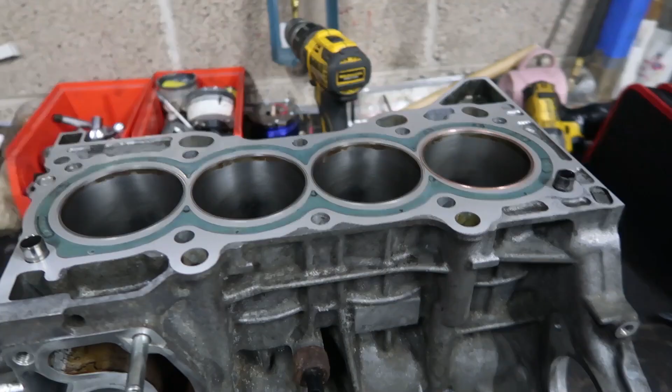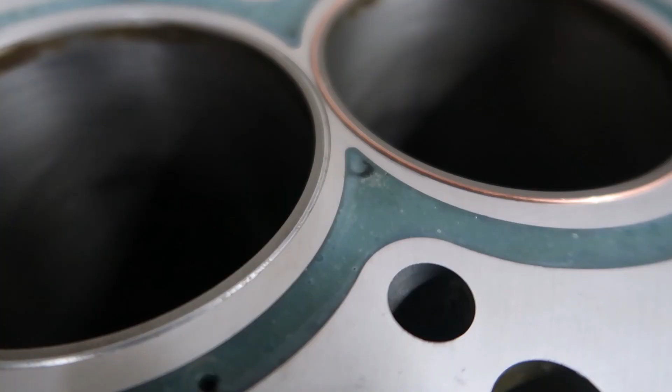The idea is you don't want the head to lift or pass any exhaust gases through, because I'm going to be running on ethanol and some seriously high-ish boost numbers, prepping the block for 3 bar of boost if we wanted to go there. So yeah, we're going to start off and do these O-rings, and I'll show you me putting them in.

So O-ringing this block and decking it has been an idea of mine for a long time. I got in touch with an old school friend called Stuart Bernardini, and he's got a machine shop, 5-axis CNC lathes, all the gear. So we decided to put both our ideas together, and he ended up making the tooling, the fly cutter, and we've done some R&D with different heads to make sure that we get the right seat for this wire.

So this is just solid copper wire, and we won't tell you the specs exactly because we're going to be offering this if you want your block done, decked, with the head decked, so it's completely flat. This thing is like 0.0002 of a millimetre over a metre long, so it's completely flat. We're going to be offering this as a service mainly to folk in the UK, because there isn't really anyone around that will do this to your engine.

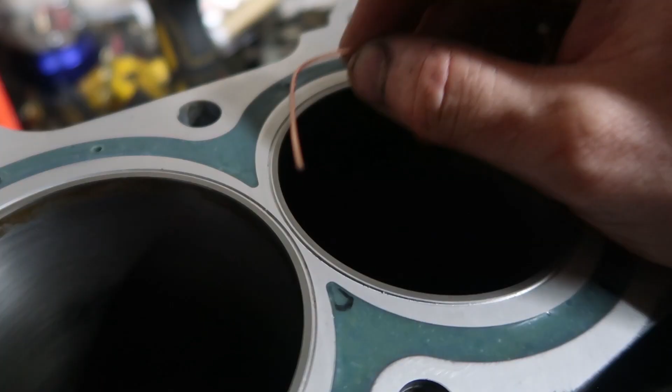So this will be really hard to show, but I have squared off the end of this copper wire. I'm going to stick it in, then start chapping it around until I get near the end, and it'll give me the size I'm needing. I've just cut this bit, which is a bit too long, because you're better to be longer than shorter. Once I've got it near the end, I'll snip it, and then I use a file to make sure that both ends are flat.

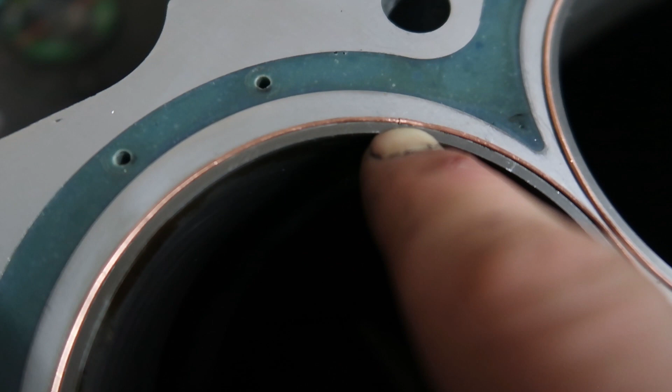So when they go down, like this one here, you can see the gap. A tiny little gap that you can hardly see. It takes a couple of attempts, but that's what I'm after. It's a lot of filing, but that one's just there. Tiny wee midgy ball hair of a gap. By the time the head's down and that's squished, that gap will probably be soaked up. So that's the first two done. Just going to go to the next one now. I'm using a nylon hammer.

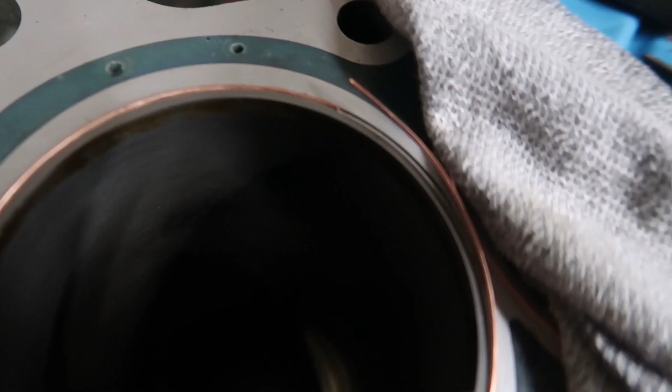So when I get it close enough, you come down and see it's slightly too big. Slightly too big there, so I just file it down till it's square, and then just finalise it and tap it in. O-ringing is complete.

Oh man, it looks so sick. Better in person than it does on this camera, probably. Still need to hone the block, but I'm going to drill the rest of the holes for the head gasket.

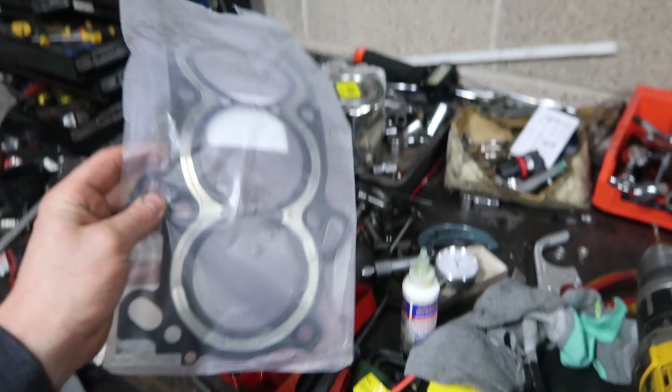And I want to show you something about here, because I've had some people say that, oh, these holes are not going to be flowing enough. Let me show you this. So here we have the OEM head gasket, and look at the holes in this. Guys, there isn't any. Okay, so I'm actually going to put holes in it. This is a K24 head gasket, though the K20 is slightly different, it has different holes.

So I want you to try and think of this in a sort of different perspective. I like everything flowing fast, you know, high pressure, everything's flowing well. But with a coolant system, it's kind of a little bit different. And this is something I learned, but I'd like to pass it on to you guys. The reason you have small holes on the head gasket itself is actually to slow flow down.

And if you think about it, the heat from the cylinder walls needs to transfer into the water. So if you have the water rushing past, it doesn't pull the heat out of the cylinder wall. So you actually need the water to slow down enough to let the heat transfer from the cylinder wall, the barrels themselves, into the water and then through into the head and out. So that's the idea of small holes. It was something that took me by surprise. Like, oh yeah, it kind of makes sense.

So yeah, what I'm going to do is, I think these were around about 3mm holes that I used, and that to me is going to flow enough. I don't know if you've seen on Instagram a while back, I'd done a hose in the block, and it showed actually how much water flows out just from them little holes. But if I have overheating issues, you know probably what's causing it. That's one thing I'm actually half nervous to see, how it copes with the heat management. So yeah, like I say, send it, we'll see how it does. But what I'm going to do now is drill some extra holes in the head gasket.

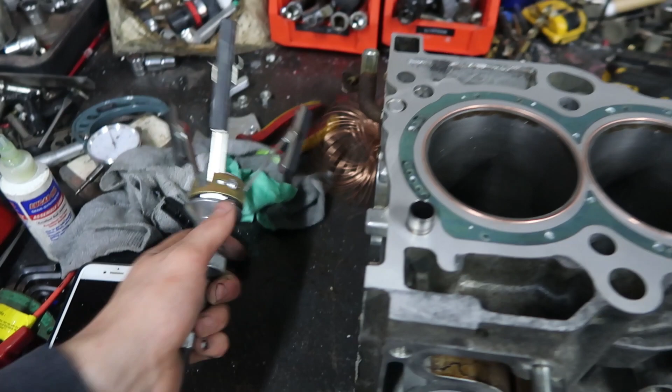Anyway, what I'm going to do now is get the hone tool here. I'm going to bash it in. We're going to give these barrels just a bit of a hone. We're going to clean it all out again. We're going to get the piston rings, and we're going to start ringing the block. And we'll go over the specs I'm going to use as and when we go. And as per usual with this, it's not a how-to, it's just how I'm doing it. This is my engine, my prototype. You can do whatever the fuck you want, but I'm going to hone it with this.

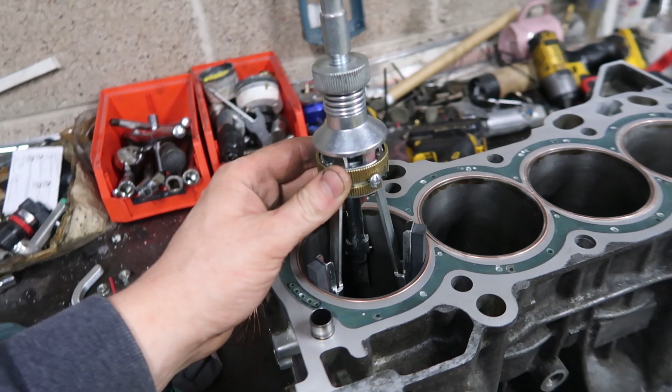You can actually see the original hone marks are still there. If anything, they're not steep enough for my liking. I like around about 45 degrees, which does mean I'm going to go up and down quite fast. I'll start off slow, and then once I've got the cut I want, I'll start going faster, a few passes to get them grooves in there. And don't go too far down because you start hitting parts of the block you're not supposed to.

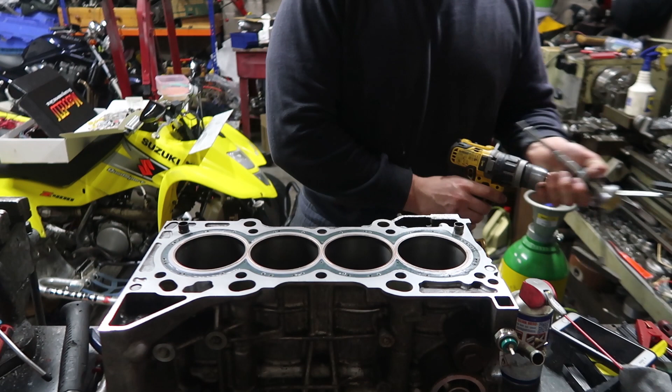Right, do not fall over. Fucking expensive camera. It's a shame the bastard won't focus though when it's supposed to.

In here I've also used WD-40. Folk use different stuff, I just use this because it's light. If I use engine oil it might lubricate it a bit too much. So I'll go down to see the max I can go, and then I know just basically to stay above that.

Just giving it a clean. Oh yeah. And then that's it, kind of as clean as I wanted it. I can see the brown marks at the top are coming away now. So now I speed it up a step, and I just start giving it fast up and down.

Let me show you what it looks like. Like I say here, probably need to give it a clean down, but you can see the hone marks now. The sort of 45 degree I've gone for, quite a drastic angle compared to standard. And also I've got rid of all the brown marks, the glazing, the varnishing inside the barrel. That's all I'm going to do, and I'll do the same for these other three, just so the rings are nice and going to bed into a nice fresh surface.

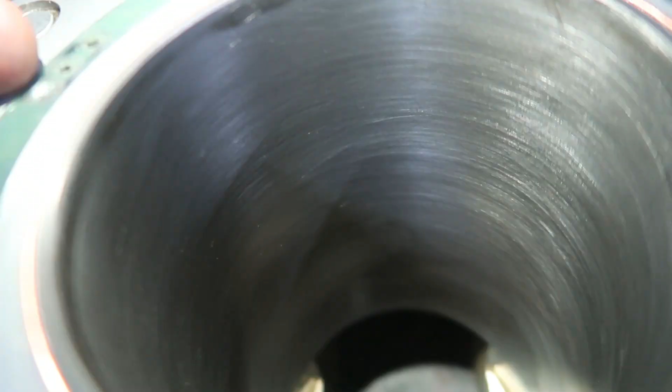So you can see here, this is the nice fresh hone marks, and this is when it's untouched. You can see down the bottom there as well, there's a step, a very slight step of carbon glazing build up, so that's what we're wanting to get rid of, that brown shite down there. All done. Needs a clean obviously.

You really need to clean out these barrels once you've done the hones, because there's like microscopic bits of, you know, grinding stone and steel and stuff like that. So that just turns it into like a lapping paste. And when you're in the car without cleaning it, it just basically glazes up the bores. And if you didn't know, glazed bores cause less compression than bores like this.

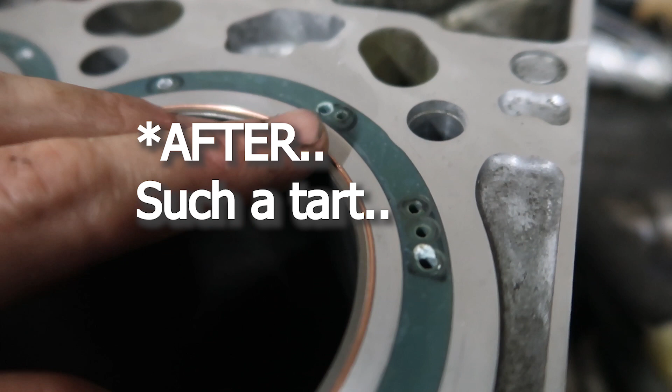What I should say though is I probably should have done this before. I probably should have done the O-rings before I'd done that, because the wee tool kicked out, and as you can see here, it nicked one of my copper O-rings. I think it was flying out at a rate of knots. It snapped itself there. Just... she's a right hoorah tool like.

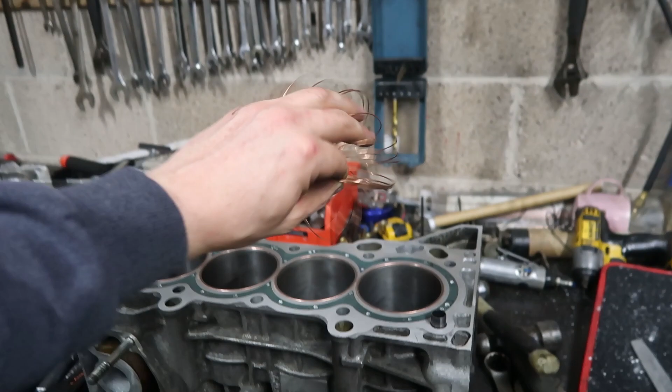So what we'll do is I'll get a pick and I'll pick out this ring. Not looking forward to that, to be honest. And then we'll just stick in a new one. I've got loads of this stuff, so we've got plenty spare. Rings now, just when you put your pink paint markers in there, just make sure to drip all over your rings. Oh, gonna hate to clean these bastards up already. That shit doesn't seal too good.

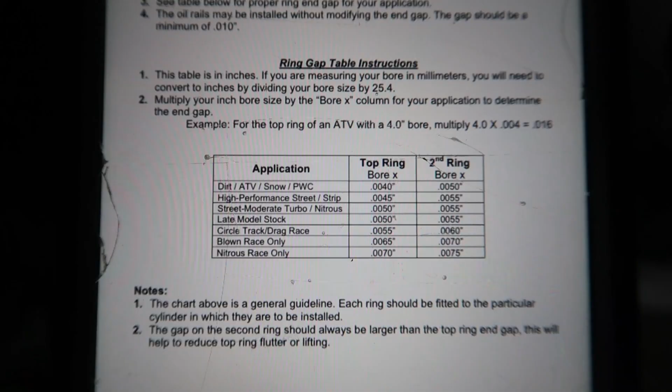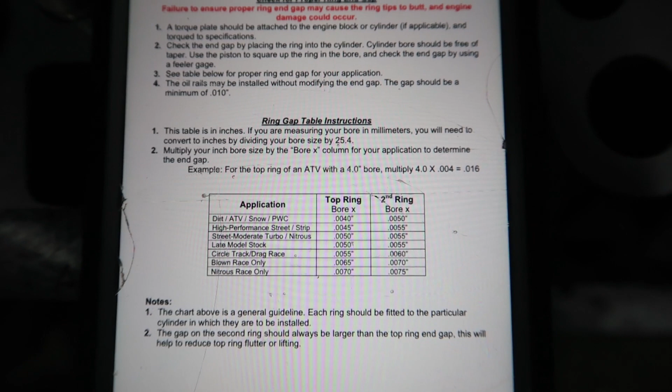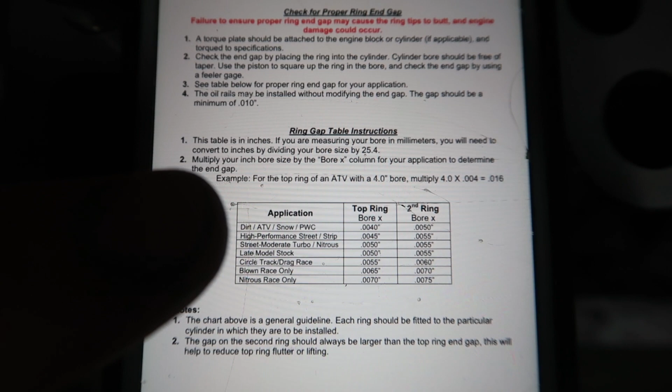So I lost my bit of paper, but here's the Wiseco piston ring gap thing, and this is all in inches, so I'm gonna have to try and change it. I'll see what my feeler gauge says and we'll go with that. But to calculate it out, basically you need your bore size. So our bore size is say 3 inch for instance, 3.5 or whatever it is, and you have to multiply that by the size that you're after. So we're going to go for high performance street strip or street moderate turbo.

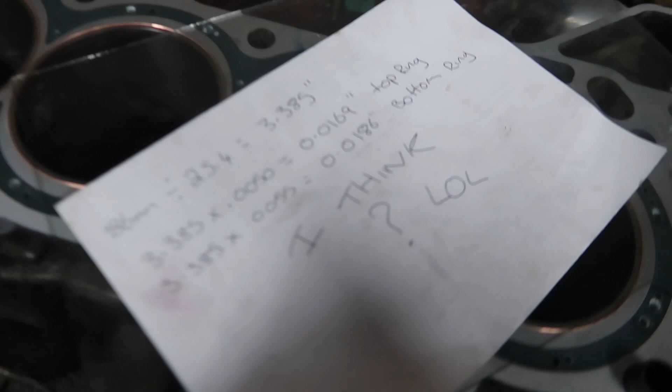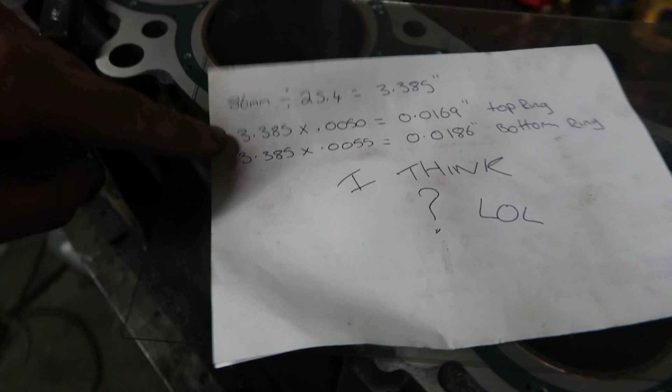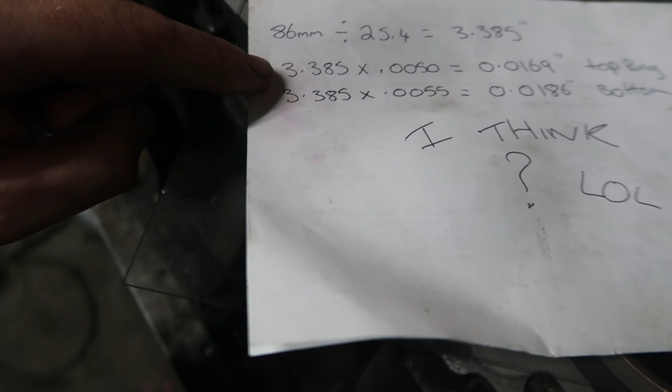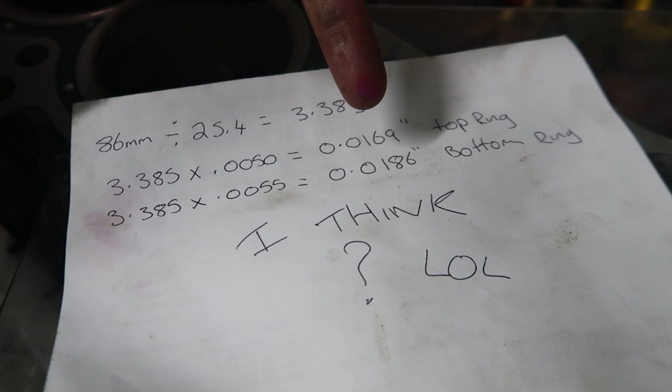So to save you guys all the calculations, because it took me about 5-10 minutes to work this out because I'm not very good at maths, I ended up using my phone. But 86mm divided by 25.4 gives you 3.385 inches. So then you take your 3.385 inches and times it by the 0.0050. And that gives you, is that 16 thou? I think that's 16 thou. I hate this imperial system, but hey, we're going to go with it.

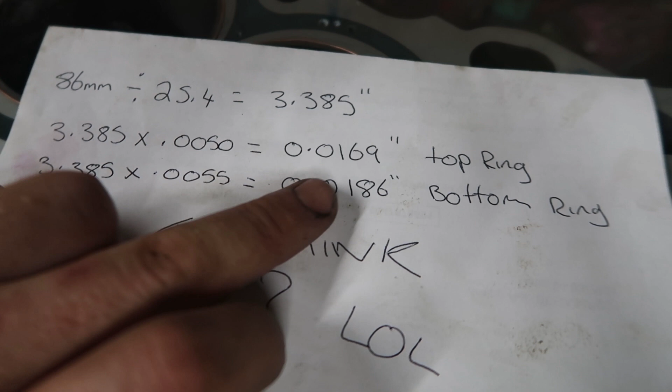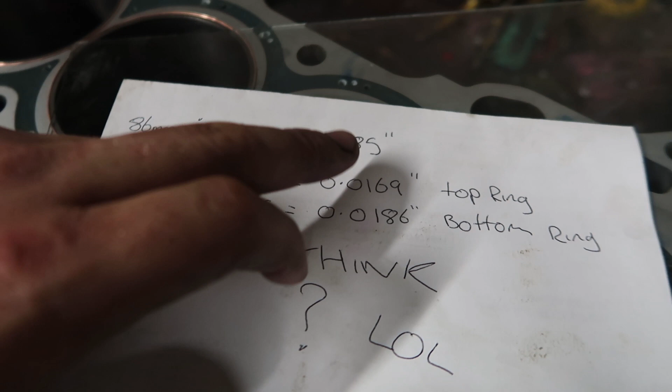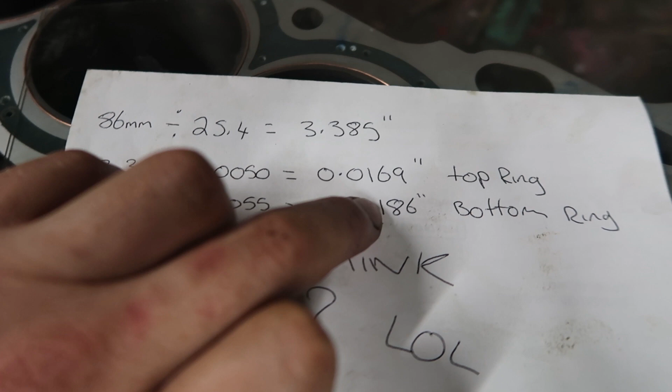So the top ring, we're going to say is going to be 16 thou. And the bottom ring is going to be 18 thou. You want the second ring to always be looser than the top ring. I think it's to do with blow-by, so the blow-by goes down the way, it doesn't cause a pocket in between the two and cause pre-ignition and all that sort of good shit. So 16 thou and 18 thou, yeah, you could probably say that's 17 thou.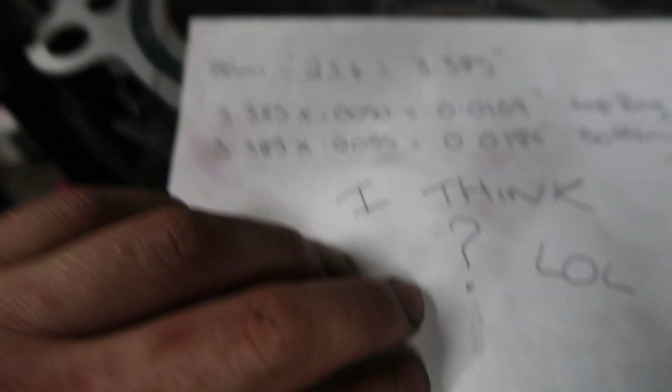Because I'm just going to go with it. I've got these feeler gauges out here, and they do inches and millimeters. So if you work in millimeters, 16 thou is 0.4 mil, and 0.457 mil on the 18 thou.

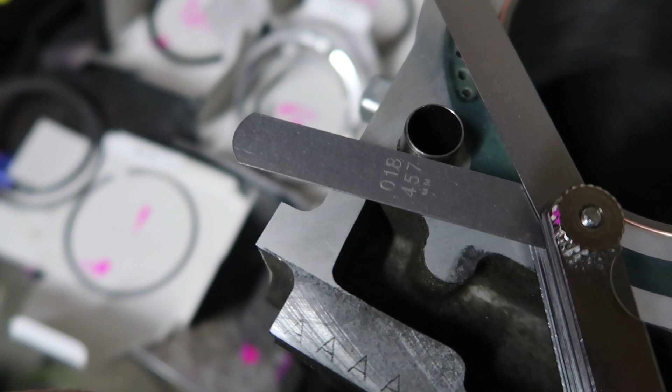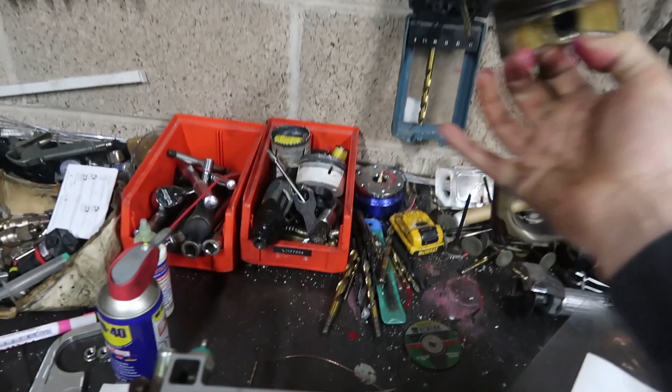So, to stick the ring in the block, you've probably seen this a million times, I don't know if you've seen it in my last videos. Put the ring in and then center it down with an old piston, just to get the ring all level for when we're doing it.

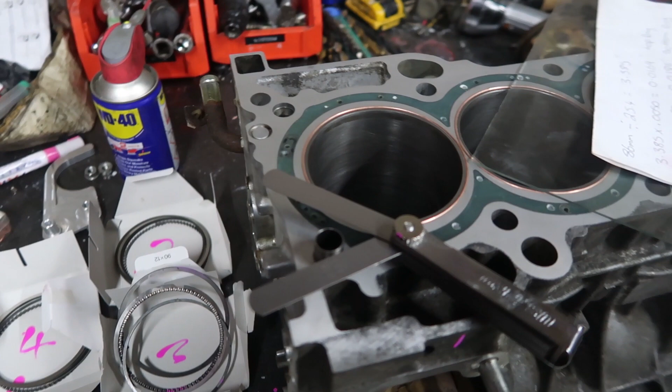And for grinding these down, I don't really want to show you, but I'm going to use the bench grinder because it's a lot faster. I've done it heaps of times now and I kind of get a feel for it. But if you guys are going to do it yourselves, don't do as I do, do as I say - get yourself a piston ring tool or grinder, whatever you want to use. I'm doing it my way or the highway.

So yeah, first ring I've put in there. I've not done it yet, but I'm just sort of getting there. Oh my god, this camera is doing my head in. But it's in the seat there.

The reason I'm going to put all the rings in is because if you find one that's particularly slack, you can move it around till you get it where you need it. This thing here has a marker on it saying N for no chance, and to get the rings in I like to push them in like this and spin them round, because otherwise you can chip the corners.

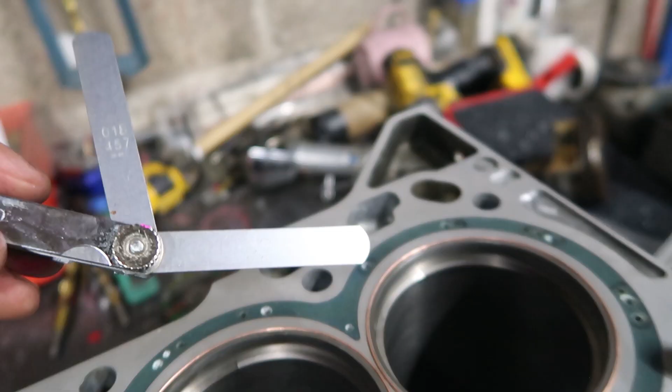That gets it in. So first things first, I've tried... yeah, bastard. So as you can see, my wee gaps in here - this camera is not going to focus on what it should be - and I've just made sure that these don't fit any of the gaps, and they don't, and that's the 16 thou, so I just need to open them all up now.

Just a wee midge's ball here. So there we have it. We have it fitting in there snugly, fitting in there snugly, fitting in there snugly, and fitting in there snugly. 16 thou. Fucking camera.

So I don't know if it's just me, but most times it doesn't matter if it's D16, doesn't matter if it's K20, doesn't matter if it was 1.8 turbo - any of the engines I've built - the second ring always is bang on. I never have to touch the second rings ever. I don't know what it is, they just seem to be bang on.

But there's not a lot of information as to what to do with the oil rail. So this is what we class as the oil rail, or the oiling scraper rings. These don't really get clearance as such - you just need to make sure there is a gap. I'm sure as long as it's minimum like 0.1 of a thou, a 10th thou, which is like fucking nothing, it doesn't really matter the size of these.

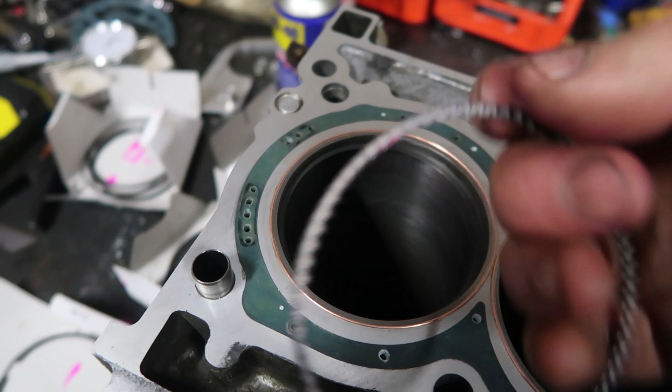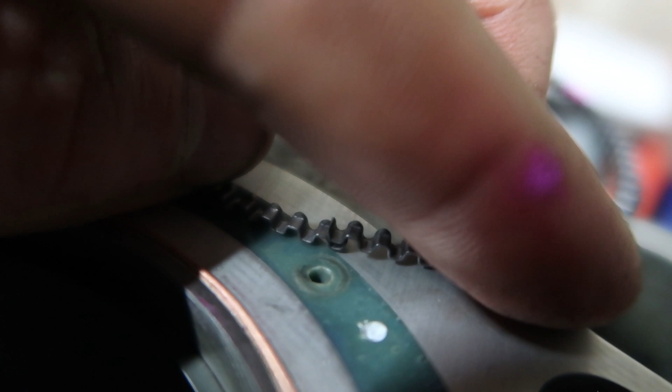Don't worry about them too much. You don't gap them like you do your piston rings. You just need to make sure that this piece here - it's going to be impossible to show you, hold on - just got to make sure that it butts up against each other and doesn't sit on top of it or anything like that. Like that, that's bad. And like that is fine.

Just a quick look inside here, and spread it all out to make sure that it doesn't butt up. They should always be slightly smaller than the bore, but it's more just a double check that something hasn't happened at the factory where they've made the rings and there was a mistake. So just check them anyway, just chuck them in to make sure you've got plenty clearance.

So what I'm going to do now is give this block a good clean down, just keep cleaning it, and then I'm going to whip the pistons out. We're going to put the pistons onto the rods and we'll put the rings onto the pistons and get ready for assembling the bottom end.

So we've got it upside down now, and now I need to block off the oil jets. Typically you block off these oil squirters when you're going forged pistons, because the forged pistons themselves are a better material and can take a bit more heat. These cooling jets are good if you're going for a cast piston or stock block, but yeah, we can get rid of them now.

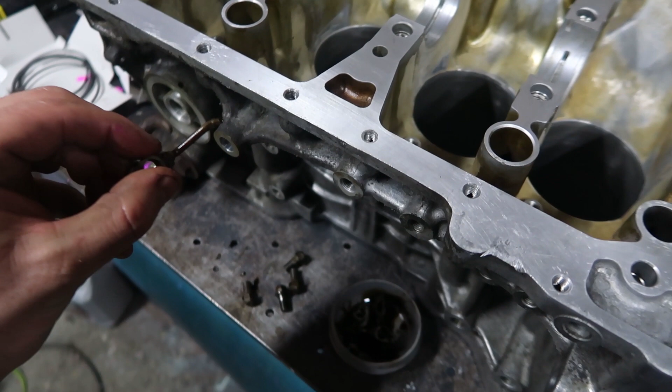So I just need to go on the lathe and whip up some wee spacers, because these have little holes in them which feed out to the squirters. Once you do that, you get more oil pressure because you've not got it all leaking out of the wee squirters.

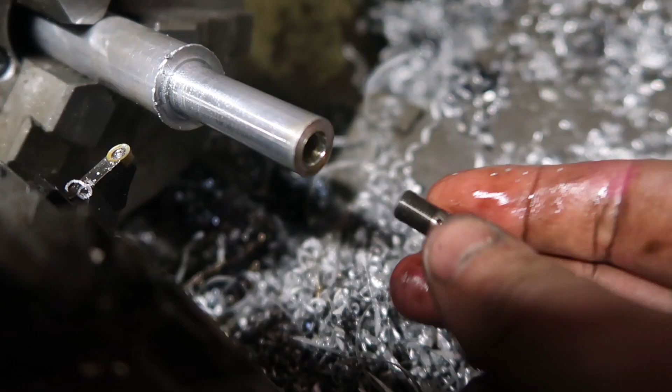So we're on now to the lathe. I've just chucked a bit in here. We'll turn this down to around 12mm, maybe 12-13mm, and then bore the inside 8mm, and then part off the little pieces we're going to use for blanks. That looks like it's going to be perfect.

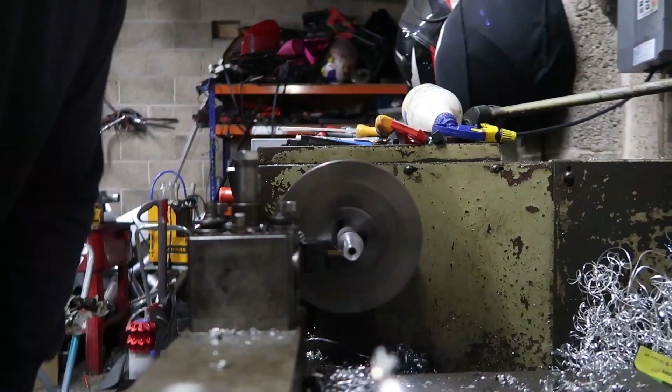There we go, wee spacers made up. I'll just thread lock the ends and stick them into them.

So I've cleaned down the surfaces here, I've got the bearings in place, I'll probably stick some oil in here, and then I'm going to lay in the crank.

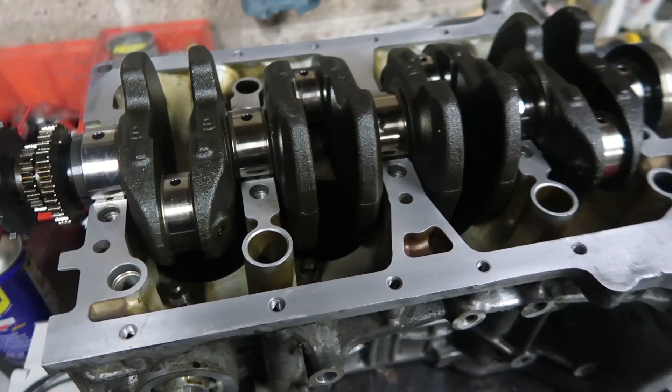So crank end looking shiny, I've got thrust washers here. Eventually found them after my missus had hidden them away. King bearings I've gone for. The OEM ones though, you'd be fine, they've not worn down at all, especially because I'm DCT gearbox. But I think they're just very slightly thicker maybe. Yeah, we'll fire them in anyway, we've got them, so we might as well use them.

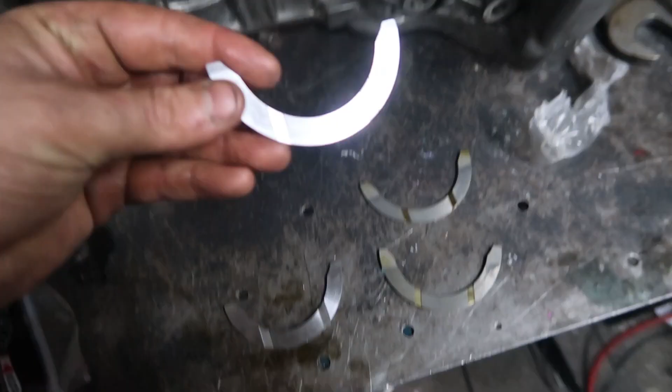And they go in here, either side. Always remember, these have to face out the way, facing towards the crank with these notches here. Here we go.

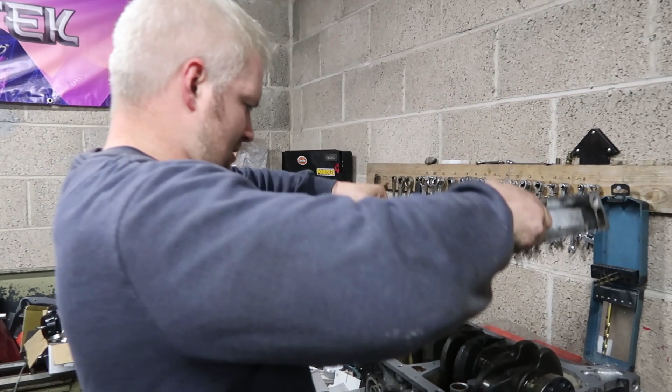Oh yeah. Now I need to get the main bolts. What I'll do now, we'll give this thing a wee spin.

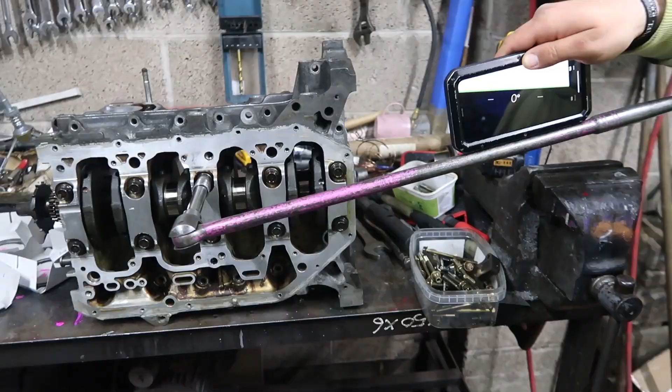So we're getting creative here when it comes to doing the angles on this. 29 Newton meters all the way around, and then we need to go 56. So we've zeroed out the phone and we're going to wing it around 56 degrees. And that should do.

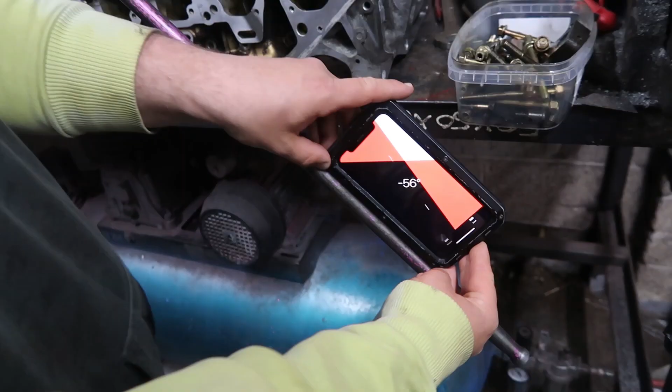That's how we should do it, broski. So there we have it. She's all torqued up, ready to go.

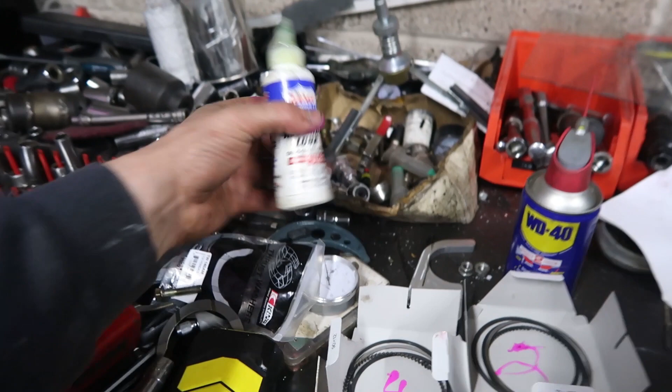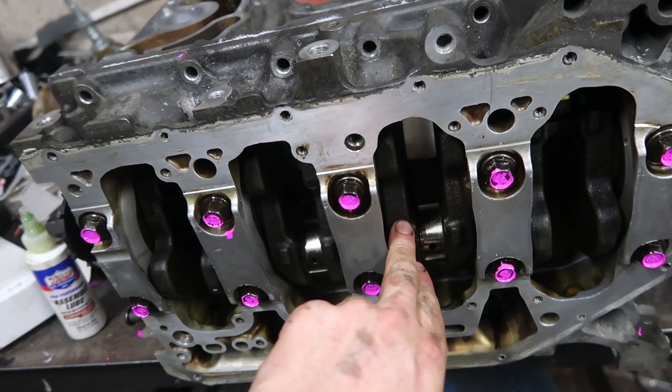So it feels like butter smooth, even with me using this Lucas assembly lube. I use it with all the engine stuff. It seems to work, but it's thick, like a thick goop rather than like a thin oil. So yeah, she's spinning nicely, nice and free.

So all torqued up. The next stage is basically rods and pistons and stuff like that, but I might do that into the next video because this is starting to drag on.

So this will be like part 1 of the build. Part 2 will be sticking in the Maxspeedingrods rods, the pistons. I'll be porting the oil pump in that as well. It'll just be good to have it on an engine stand because it's just kind of on the bench just now. And then we can put on the head, do the head and all the valves and stuff like that. The valves themselves, I don't know if you've seen, they've got a ceramic coating on them as well. So interested to see how this all turns out.